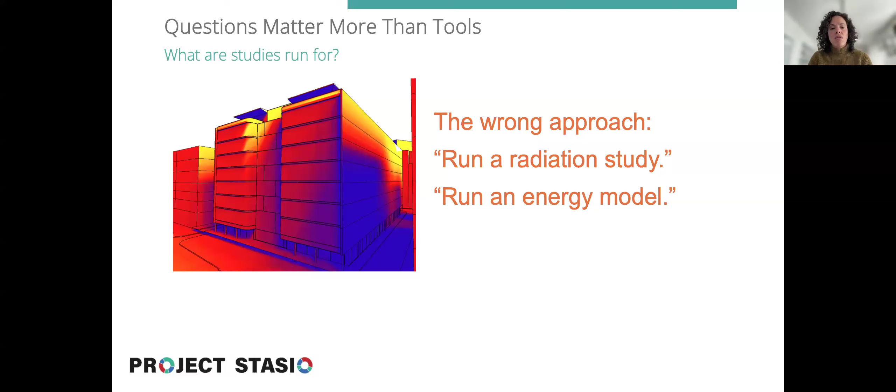Without making the story too long, we got together and tried to think about ways to change that and improve how building performance simulators communicate with architects and owners to impact design. One of the first steps we came up with was realizing that we weren't really even asking questions at all when running simulations — we were just doing the simulation and then trying to figure out why we ran it. So we came up with a framework on how to frame questions to provide useful answers.

Very simple: we ask what is the impact of a particular variable on a particular metric. This forces us, if architects and owners agree to use this format, to sit down and talk about what metric we're going to use and what variable we're going to use, so that whenever we run the simulation there's no confusion — like someone thinking we were talking about daylighting while someone else thought we were talking about energy. So that was step one for Stasio.

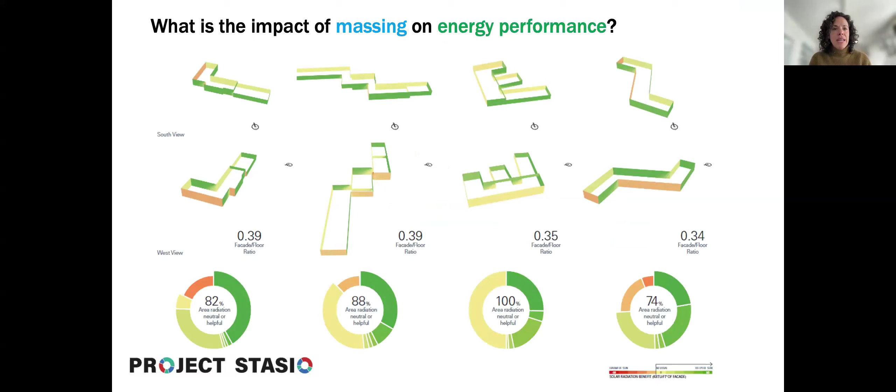These are some of the graphics that are in Stasio, which I'll talk about more later. For example, instead of just running a massing analysis and saying we ran this analysis, we say we're running a massing analysis that evaluates the impact of massing on energy performance, or the impact of HVAC selection on EUI. So it's a bit more specific, and it helps us understand why we're running a particular simulation.

Project Stasio then took it a step forward and created an online community — a space for everyone to share their ways to best communicate the results graphically to these questions. Project Stasio is a website, projectstasio.com, that I hope you have all visited. It's a fabulous repository where anyone can submit ideas or successful graphics they have used to impact design decisions.

These submissions are framed with the question I just introduced and have very unique ways to answer them. As a consultant, I use Stasio all the time for inspiration when trying to figure out the best way, the prettiest way, the most insightful way to communicate multi-dimensional data sets. I really hope you can use it too.

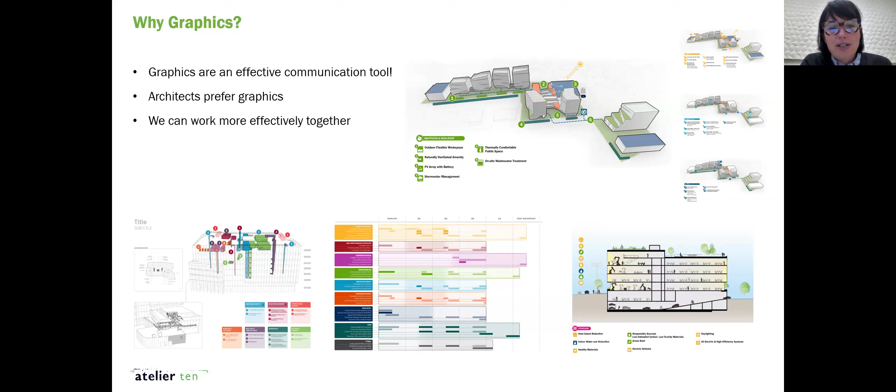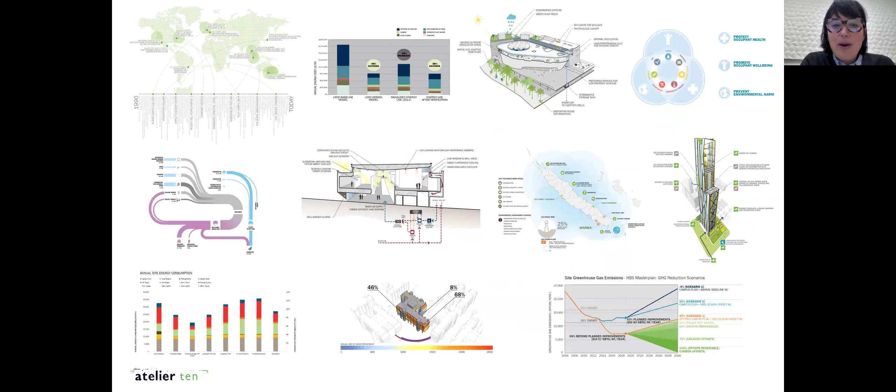Junko and I work together at Atelier Ten amongst a team of environmental consultants and carbon strategists. Today we are going to discuss what we call the business case for engaging environmental graphics. We think graphics are effective for communicating concepts, a range of ideas, and results, and they're great at getting the attention of architects. The goal of creating compelling graphics is to increase the effectiveness of how we work together, and there are so many types of graphics. Today we aim to open up the curtain behind these, how they were created, why we made each graphic, and most of all, we want to inspire everybody to make more of their own.

So how, as a first step, where do you start? I think what you want to understand is what is the concept that you're trying to communicate and who is the audience, because that could really change how your graphic could develop.

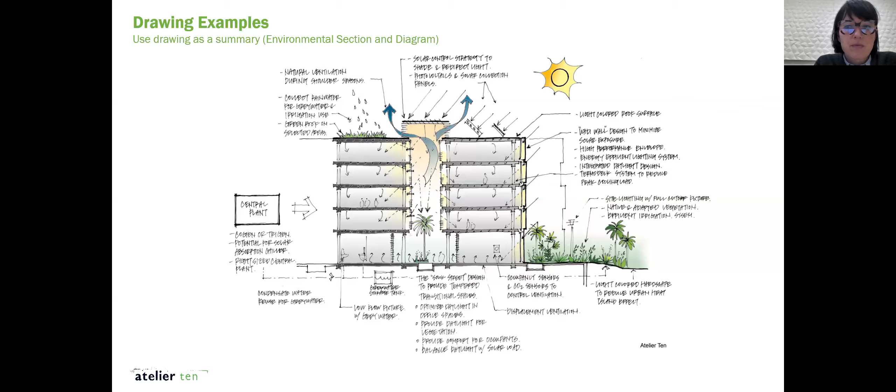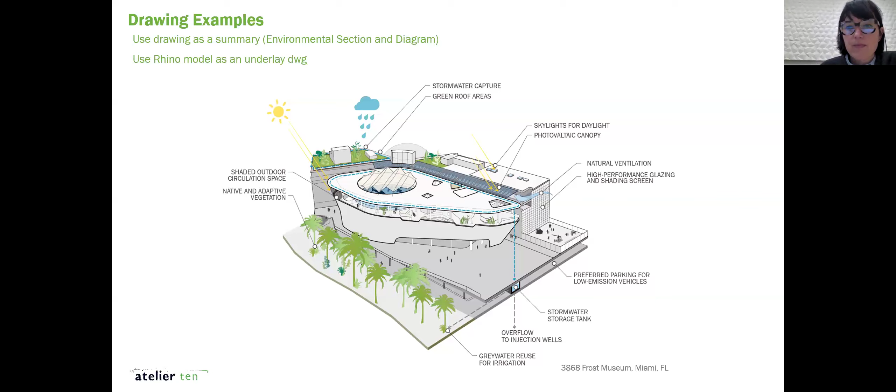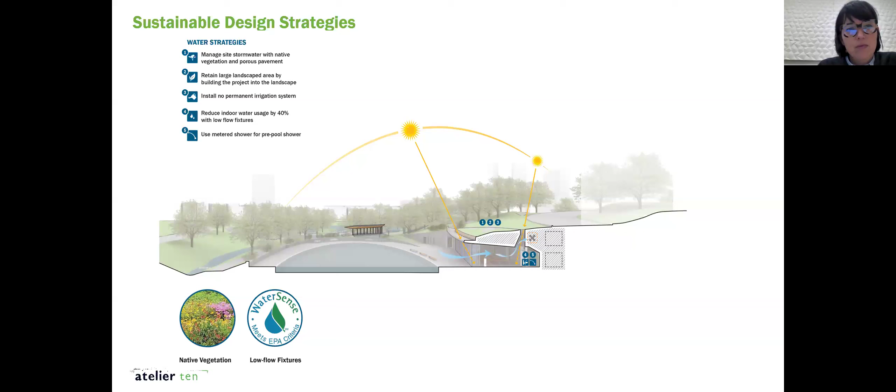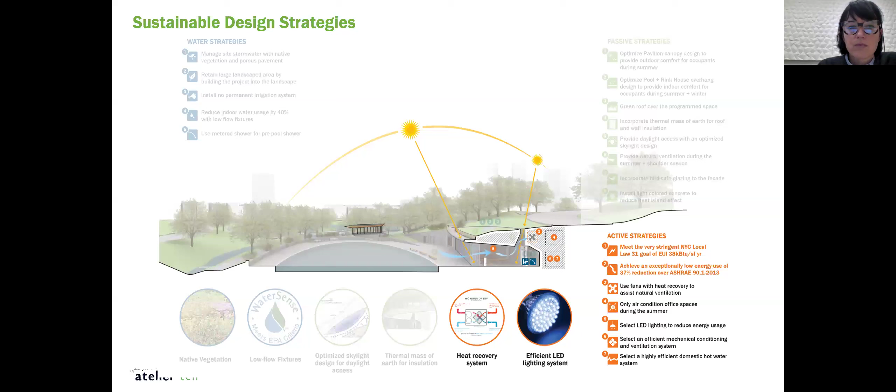There's a passive strategy, because this building is buried underground — a lot of passive strategies there with canopy, really trying to keep it naturally ventilated, very low energy. And then there's also the active strategy of meeting a very stringent local law energy EUI target, with very strategic energy use at certain times. These three concepts were really important to explain for the public, so we put it all together in this way.

So you're seeing this layering of ideas — this takes a little more coordination. We have to work backwards from this diagram and then filter it down to the three layers. But this is another way to explain the project in a simple sequence while keeping it together: three concepts, each with a number of strategies, and each layer reveals itself. So this is another way to show a very comprehensive set of concepts in this project.

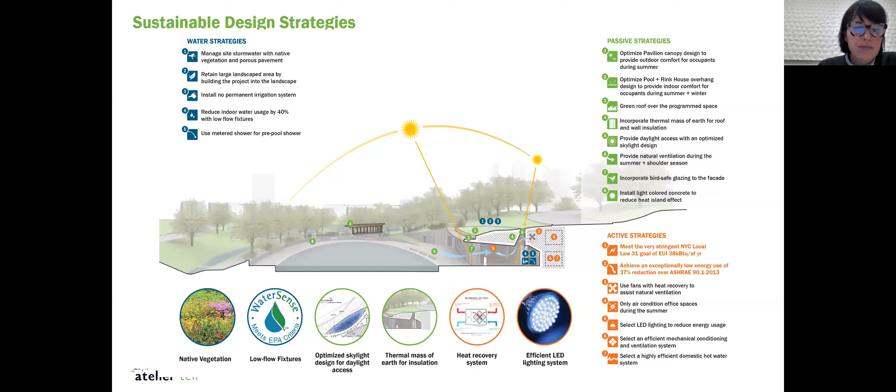So moving on to the second type of diagram, which is more like a tool. This particular project is the National Geographic Building, an existing building in DC that we're trying to incorporate sustainable strategies into, to really improve the health of the indoor environment for occupants. This was a coordination with our collaborator, all of our design team members, really trying to figure out two things.

We did it in a very simple way, with blue and yellow colors. Yellow is daylight, trying to bring daylight deeper into the space. It's an existing building, so you have to incorporate kind of an atrium inside, puncturing through the existing envelope, which you can see in the yellow highlighted pieces. Blue is to update the fenestration, since the old existing building needed an upgrade, and we wanted to bring in as much daylight as possible from the facade. So very simple, but we're using color to look at those two components together.

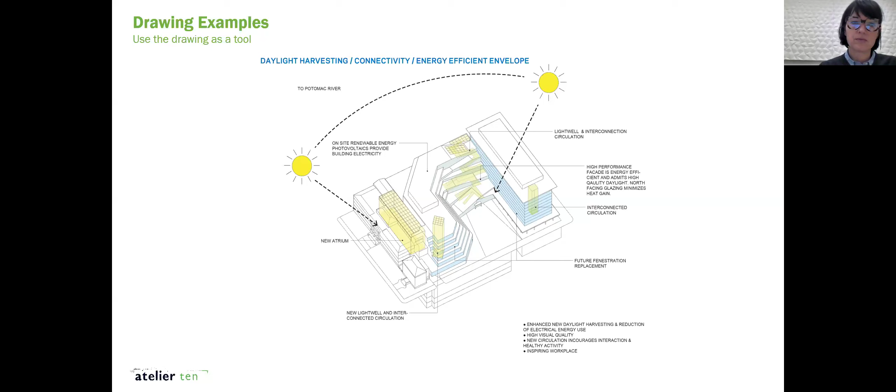This is a project in New York City, looking at daylight quality in the space and how to design the facade. This shows incident solar radiation on the east facade, and you can see the gradation. Rather than having one tone or level of color on the east facade, because of all the surrounding buildings coming up—this is in downtown Brooklyn—we have a gradation on the facade. It's very easy to understand graphically when you use this kind of gradation of color, and how the facade differs from one side to the other.

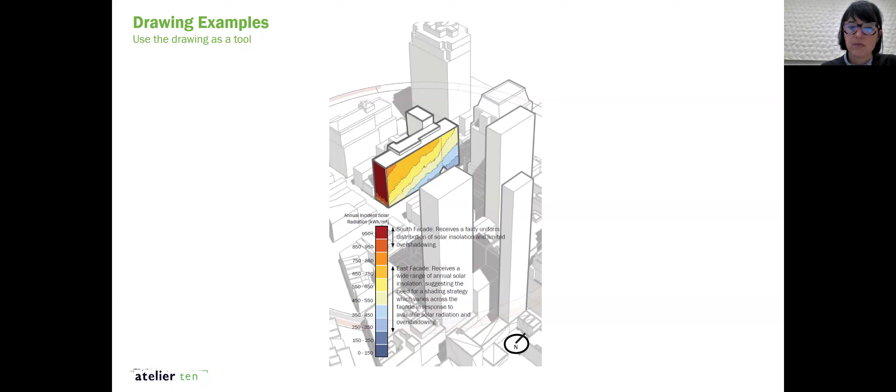What's neat is that from this diagram, we ended up creating a second graphic. If you look at the graphic at the bottom left, it kind of looks like the one on the previous page, but it's slightly different—each rectangular color represents an annual average illuminance level on a horizontal surface in a perimeter workspace. So imagine someone sitting right by the window. That's how much daylight you would have on that facade if you have no exterior shades.

That led us to the graphic in the middle, a gray tone graphic that shows what kind of shading we should incorporate into the project, by the level of cutoff angles—65, 70, 75, 80 degrees. Those are the gradations of how deep the shade needs to be in order to make useful daylight inside the space on this perimeter horizontal surface.

If we incorporate that middle guideline of shading strategies, we achieve the graphic on the very right bottom, which has a green and yellow tone, meaning the daylight level is in its useful range. The photograph on top is the resulting end-of-construction photograph. You can see it's very subtle, but the shade is actually deeper as you go higher in the building and towards the left side.

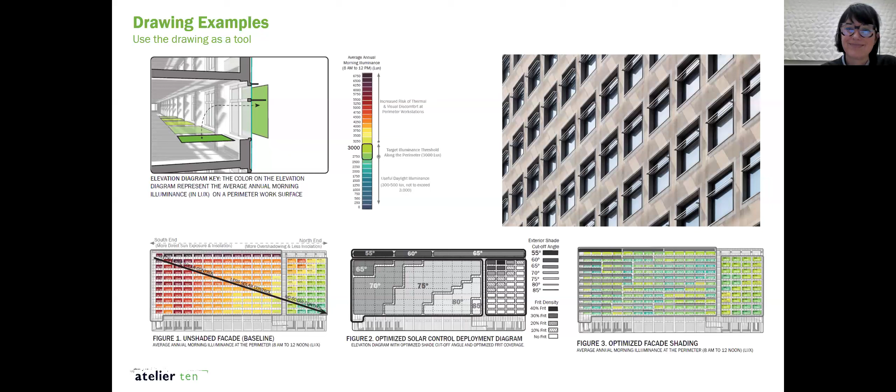Another tool looks at stormwater and water management. As you may know, water is complex. It also requires collaboration with the civil engineer, the plumbing engineer who's only looking at the interior, and the landscape architect. So there are all these different parties looking at their individual section, but there's a lot of overlap between these experts, so we bring the whole team together.

To explain what is happening overall, we often do a diagram like this that's very complex, but it's really helpful because now everybody can see what their contribution would be. We can say if we do this, it will impact the civil engineer, and then it will impact the landscape architect, and they can all talk together. This shows four different scenarios: business as usual, higher performance stormwater management strategy, and on the left, a zero stormwater runoff plan—so low to high, where are we going with this project. We use graphics as a tool to explain what we're doing and to initiate collaboration and conversation with the design team.

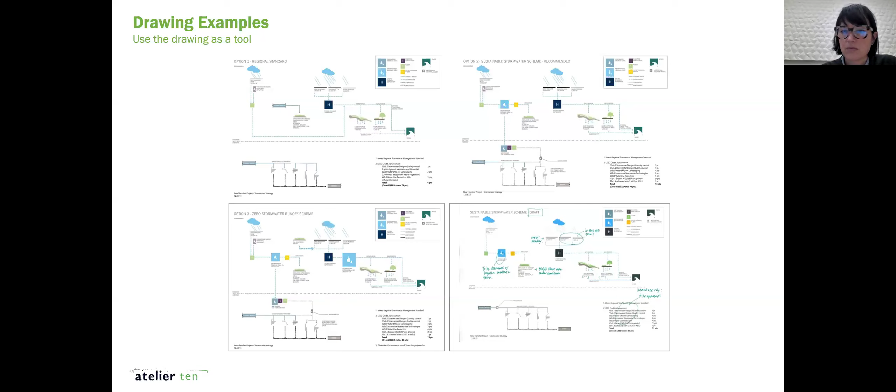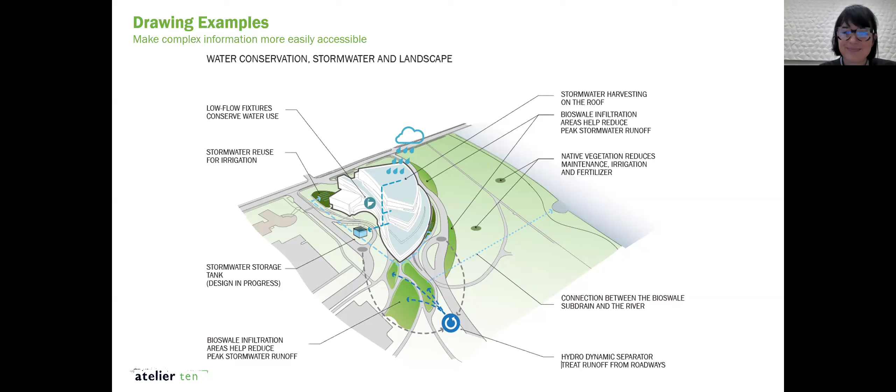I'm going to show one more graphic before passing it off to Shanta, with more really complex information. This last one is Longwood Garden in Delaware. It's a greenhouse, so you can imagine there's a lot of complexity with the different systems working together. We're looking at summer and winter.

We also have a spring scenario, really looking at how each of these components work together, because there are so many strategies working together to create the specific temperature they need to maintain for the plants in the greenhouse.

You can see the earth duct and fans working during summertime, and in winter the building is sealed up, so the earth duct is sealed, and various heating elements are incorporated just to heat the people and some of the plants. So I wanted to show another type of graphic with very complex information, trying to explain it in a very simple way.

Junko, what I like about this one too is it's subtle, but sometimes when using Illustrator to do these gradations between warm and cool, it wants to take the blue and mesh it with the red and make purple in between, which is kind of odd. So we're always manually changing it to be just a white transparent color instead, and it actually looks much more reasonable and less distracting. That's one of the tips and tricks I've seen be very successful over the years.

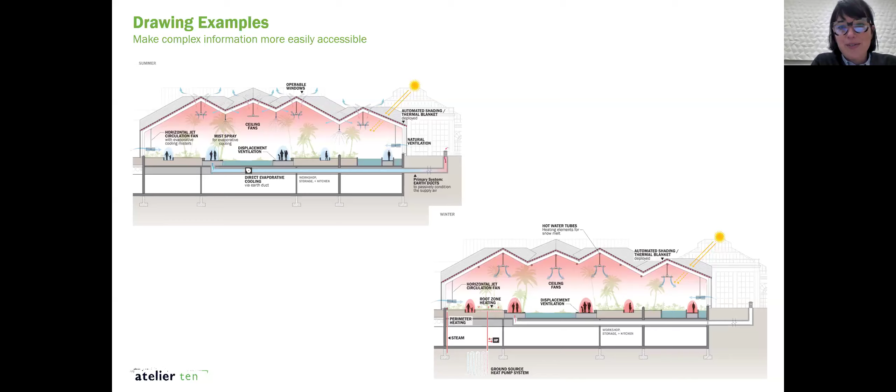So I'm going to go into some specifics on energy generally. I have a series of slides to talk about a pretty wide range of different ways we've talked about energy. This first one is a graph I used as part of a training program for university project managers at SUNY, the State University of New York, who were being introduced to a new operational carbon reduction process.

They were responsible for the client side of project management, interpreting and leading the project design teams to meet a new regulatory process involving reducing carbon emissions on the operational side.

As an overall concept, we use this image to show there's a starting point, a baseline carbon emissions. There's no scale on this graph, you'll notice, because it's not based on data - we're just trying to share a concept idea.

Each of these steps, as you go down to the right, are exactly the same size. So we're not communicating that one part necessarily needs to be focused on, but rather that everybody who has a part in any of these components has a role they need to take, and no one is more important than the other.

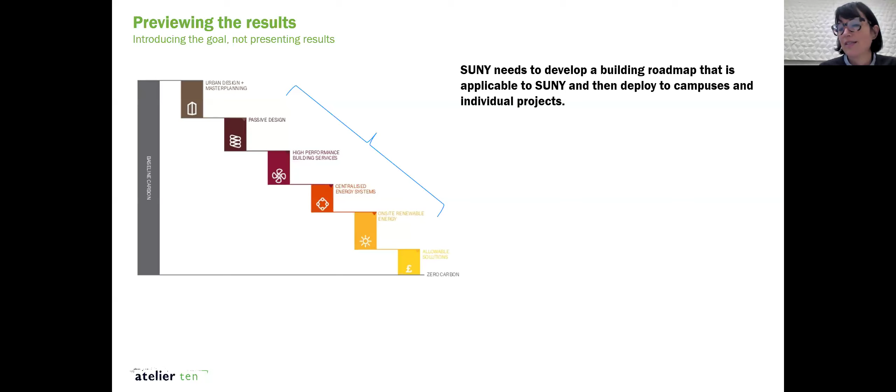The next one is the classic wedge diagram we use to show campus level carbon emissions, for about half a century's worth of time. We started by showing the reference year, 2006. The university had stated that at 2006, they wanted to start as their baseline and reduce by 80% - that's what the very first, far left yellow arrow shows.

We started our work after the university had completed a 30% reduction, so starting in 2016. We wanted to acknowledge their past efforts, and then show the different options at more of a macro level, done in very distinct colors as well.

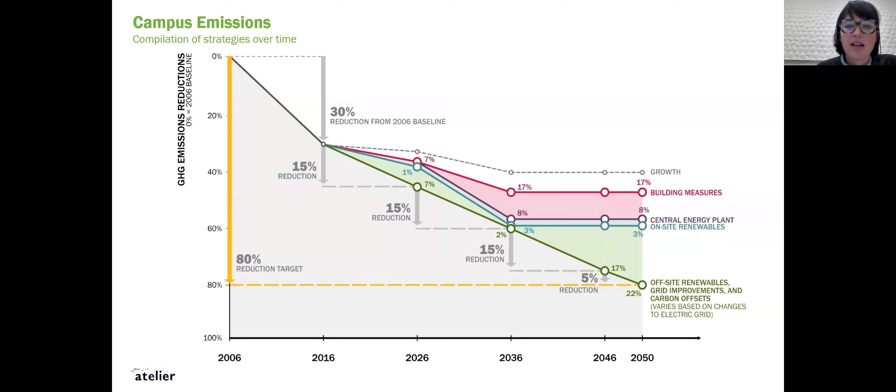So the intent was that after we showed this diagram, which was a summary of much work together to identify these critical points and different methods for reducing carbon, you would flip through the report, PowerPoint, or book, and use these colors as a map. You would follow pink, purple, green, or blue to understand how those different options could be deployed. Between the lines there are the same colors, so you can see that building-related measures, in pink, lead directly up to that purple. You would expect to find a range of building measures after flipping through the report to see how to get to this 2050 goal.

Also for campuses, I often find it's helpful to have a reference image showing the site versus source boundaries for energy or carbon, or any utility, even water. In this version, the image uses not only intuitive colors but also icons and line types. This helps you very quickly and clearly find where your building boundary is, where the campus boundary is, and where things are outside the campus in terms of utility supply.

So these are just a very easy way to have something to point to and really engage in a conversation between you as a consultant and, say, the campus engineering department, to talk about your points of reference for an upcoming energy model study and say, okay, my work is really going to affect what's happening in this building boundary. But tell me, how could this then affect what you're doing as a campus? What can we do about that?

And I have to say, this is going to be very helpful also for an architect who doesn't usually think about the central plant and the campus boundary piece. So it really communicates to all parties, and sometimes even owner side—oh great, they have all this information. That's helpful.

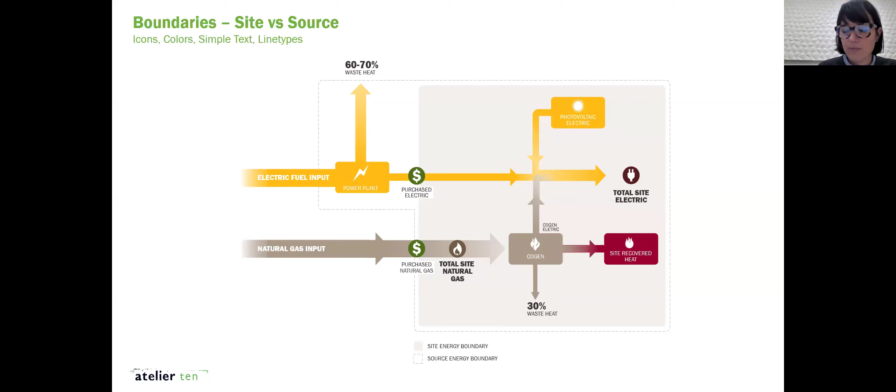Next is kind of like the classic bar chart, which I think a lot of us have seen when looking at the result of a whole building annual energy study. I just had to throw this in.

Personally, I like it when you have annual energy end uses that are color coded logically, like red for heat and yellow for lighting. The other thing I like is it has two vertical axes, so you have total energy use on one side and EUI on the other.

You can do this same thing for carbon and utility costs. It can also be done to show results for water use as well. You could add in renewable energy, and you can raise the point of where your x-axis is and show information below, but you have to be careful to make sure the sum is correct.

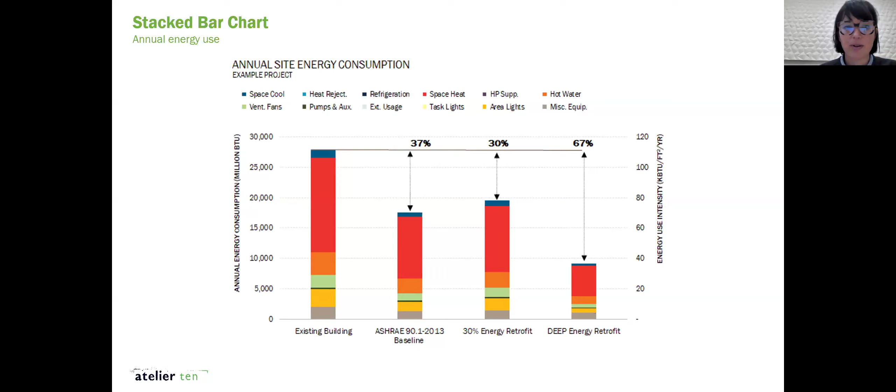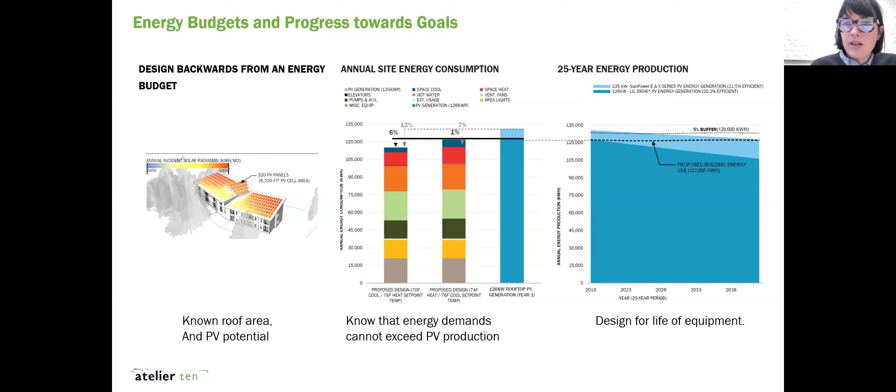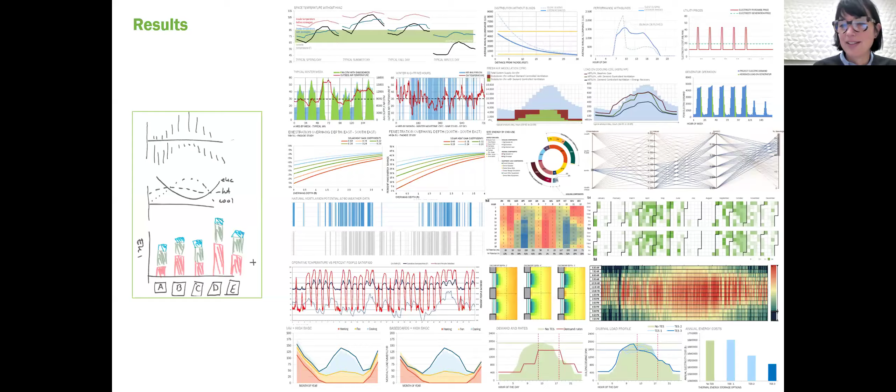So now I'm going to walk through something that's really hand sketchy and talk about how we got to what seemingly looks like a really simple image. So how did we end up making this diagram? What is a diagram in the first place? This is basically showing how we decided to break up a program of a simple building into three parts to understand how to approach the process of setting energy targets.

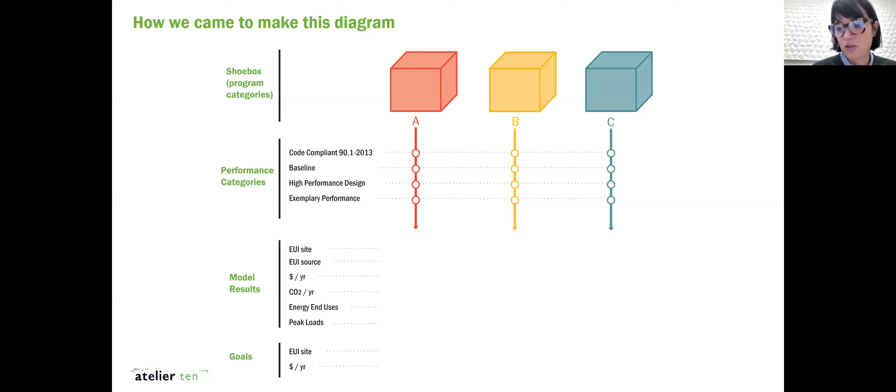So let's say this building has an office, a classroom, and a laboratory—A, B, and C. We know just by intuition they have different energy profiles, so we should look at setting energy use targets for them differently. And so this ABC shoebox program categories came out of the following kind of charrette that we illustrated here.

So this is a series of slides. We said that in the concept phase, we wanted to have a goal-setting session about passive and active strategies. We wanted to define the baseline and create some options, and then together, do that all together, and have the design team make the narrative. What kind of results do we need? What kind of outputs are important? Who is going to be the player here?

Who's going to contribute? Without putting it in hard writing, we decided to do it by hand so that folks could change their mind and say, oh, I want to be involved in this, or I think you have the wrong consultant, et cetera. We could just erase and change this as we go.

You could do this on a whiteboard, and then we say, okay, in this case we ran the energy models, but then everybody together is going to review the results. Then we're going to run a life cycle cost analysis, and have an assessment of those results together as the design team, and then present back to the client, for example. So this is just one way of doing this loosely.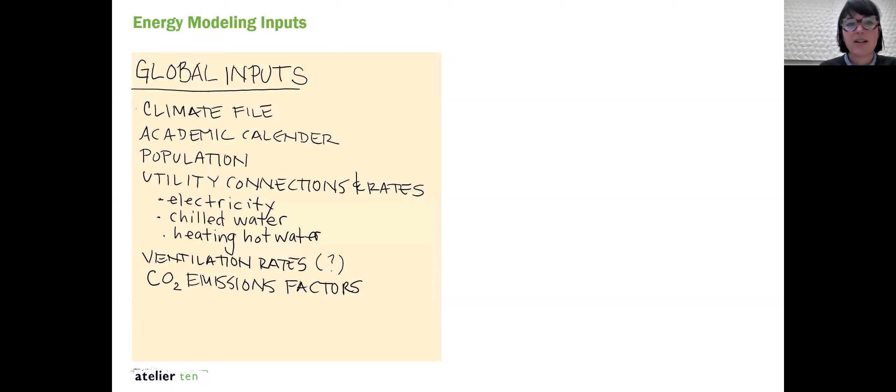So ventilation rates was a question, like, do we have to get a sense of those, or can we just use our best guess? And then how many different massing, orientation, envelope models do we want to do? What should those look like? How do we explain this process to the design team?

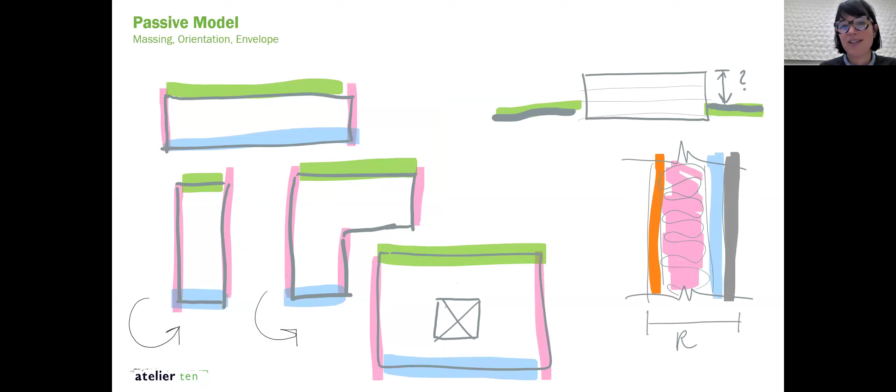We take a box, we take an L, we take an E shape, a U shape, we flip it around, we change the R value on the insulation, we run all these different options. Okay, well, how do we organize that information?

So then we had this idea, we would take that lab, classroom, office, and spread it into three different options. We thought maybe we'd have this color coding index, perhaps. I keep on saying that, but I really find color is very helpful in addition to symbols, in order to keep a lot of complicated information organized and avoid errors, like avoid inputting the results from the wrong model into the results template that we were thinking about making.

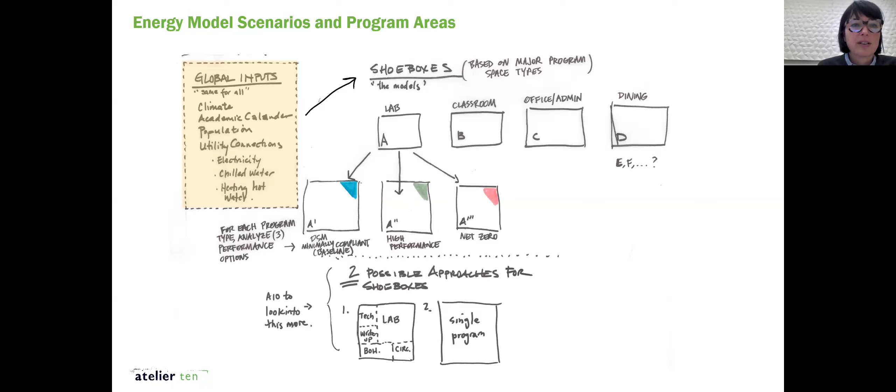So it's one of the things I like to do. Labeling and color coding can be very helpful. In the end, I think we figured out that we were going to be making way too many options from this, so that was helpful. Could we reduce the number of models and still get at the same result? This was really meant to instigate conversations.

And then what would we do just for one of the program types? For example, how many different options have we got? How many different combinations? And we just use this as an internal document to see if we were overpromising, or we were going to be just meeting their expectations or exceeding their expectations.

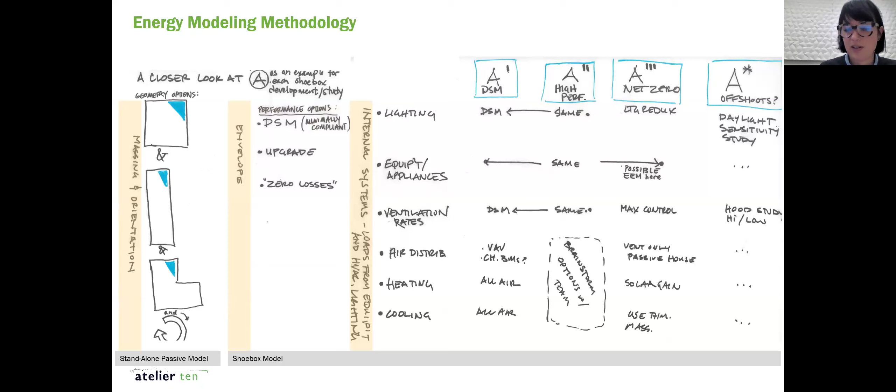And I would just encourage you to just get your pen out and your notebook and sketch what you're thinking about, and cross it out and try again, and just keep a notebook by your desk and always sketch out what you're thinking about while you're thinking.

And while you're making a spreadsheet, for example, make a sketch that accompanies it to organize your information, so that when it comes to trying to explain complicated studies like pricing options and life cycle cost analysis, you can go back to your sketchbook and maybe think about making a graphic for yourself, like make a graphic for your team or for the client.

And by having that process be parallel to your analysis on the computer, you can be using the other side of your brain to sketch, and maybe you'll come out with a different, more innovative result by doing that. And by adding a graphic into it, you might get the input from somebody who wouldn't normally relate to a numerical result. And then you'll have a better outcome for the project. Maybe you'll come up with something new and exciting and have better buy-in from your stakeholders.

So we want you to try it more for yourself.

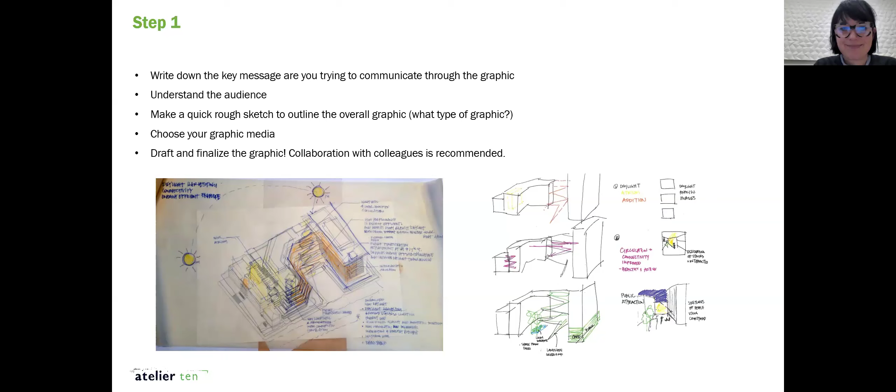Well, this should go into masterclass. I feel I could watch this a thousand times and still drool over it. So thank you so much, this is so great. I think everyone is just very excited to see this.

We don't have much time for Q&A, so I'll go straight into the specific questions. There were the tools questions, which I feel Junko, you addressed a little bit. Mine is, is PowerPoint ever the way you do graphics, or not necessarily? I think that tends to be often with consultants - there's the Illustrator and design people who have that training, and then some don't necessarily. We had a fabulous Stasio presentation on doing magic with Google Slides. Do you ever use PowerPoint?